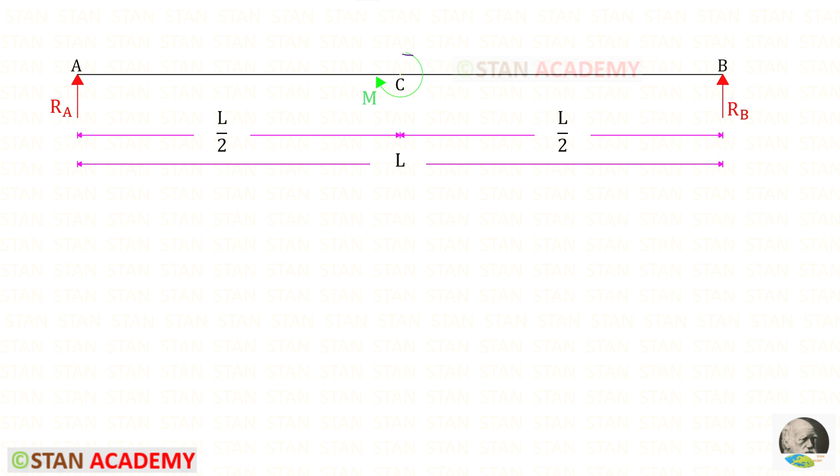Hello everyone, today in this beam we are going to derive the expressions for slope and deflection using the conjugate beam method. This is a simply supported beam subjected to a clockwise concentrated moment M in the center. This beam we have already analyzed for shear force and bending moment. Also we analyzed for slope and deflection using Macaulay's method.

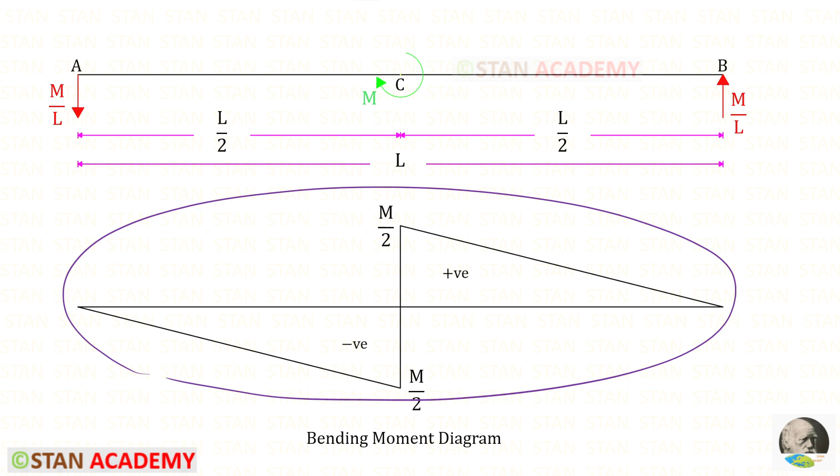Left of the center we have negative and right side of the center we have positive. This is the conjugate beam. I have kept the loading in the negative side downwards and in the positive side upwards. We have to divide the moment by EI.

To find RA dash, let us take a moment about B dash. In this case, we have to follow right hand side rule. RA dash is acting in the clockwise direction, so it will be positive and the distance is L. Let us take the left side UVL. It is acting in the anti-clockwise direction, so it will be negative. We know that for the UVL, we have to multiply the area with the centroid distance.

Let us take this triangle. We know the area formula half into BH. Here the breadth is L upon 2 and the height is M upon 2 EI. So this is the area. The centroid distance about C dash is 1 upon 3 into breadth. Here the breadth is L upon 2. So this is the centroid distance. We are taking moment about B dash. So we have to add the remaining distance which is L upon 2.

Now let us take the right side UVL. It is acting in the clockwise direction, so it will be positive. Now let us take this triangle. This is the area and the centroid distance about B dash is 2 upon 3 into breadth. Here the breadth is L upon 2. So this is the centroid distance.

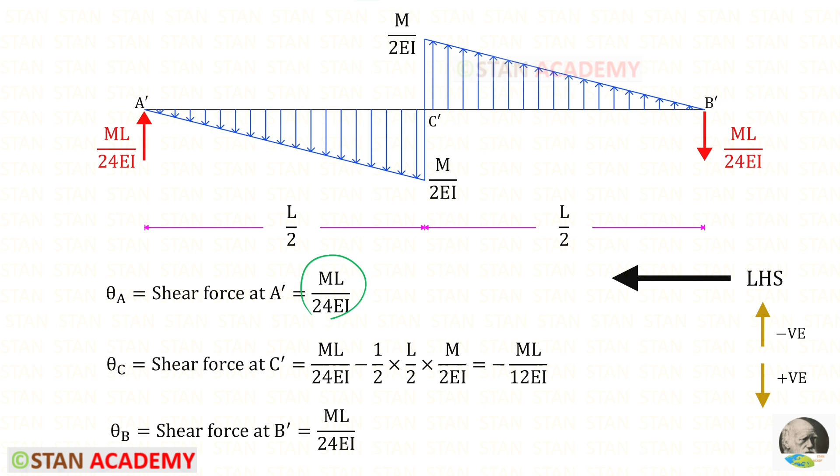Using the left hand side rule, let us find the shear force at B dash. It is acting downwards, so it will be positive. We know that these are the slopes in the real beam in the points A, C and B respectively. Using the right hand side rule, let us find the bending moment in the center, which is at C dash.

This is acting in the clockwise direction, so positive, and the distance is L upon 2. Let us take this UVL. It is acting in the anti-clockwise direction, so it will be negative. This is the area of the triangle and the centroid distance about C dash is 1 upon 3 into breadth, so it is 1 upon 3 into L upon 2. For the bending moment in the center, we will get 0. So in the real beam, the deflection in the center will be 0.

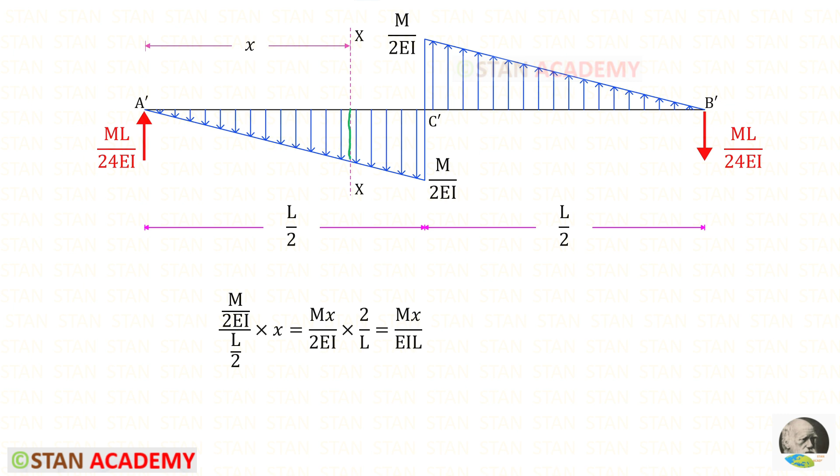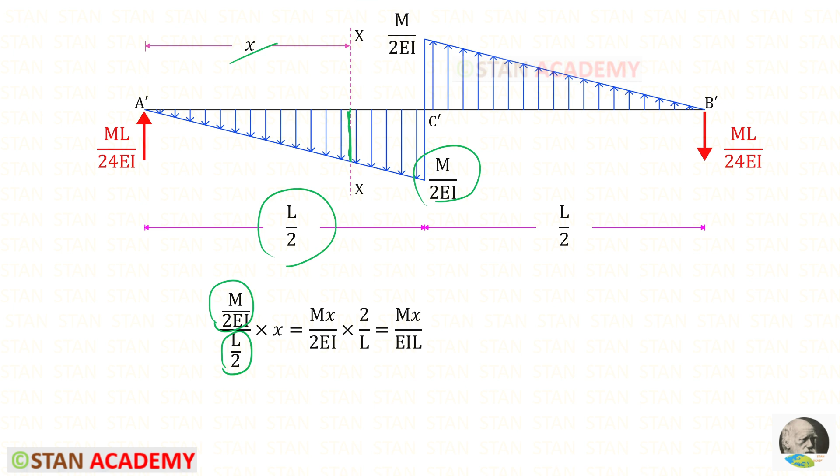Using the right hand side rule, let us find the bending moment on the section. This is acting in the clockwise direction, so positive, and the distance is x. So we will get this. Let us take the UVL. It is acting in the anti-clockwise direction, so it will be negative. We know the area formula half into BH. Here the breadth is x and this is the height. So this is the area.

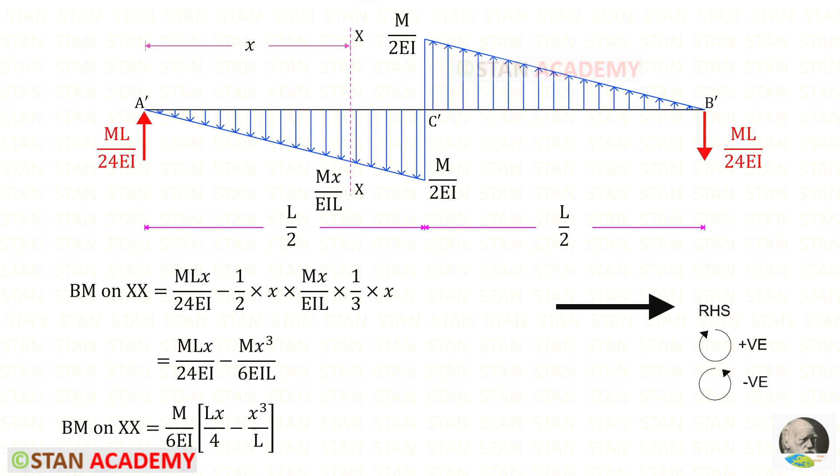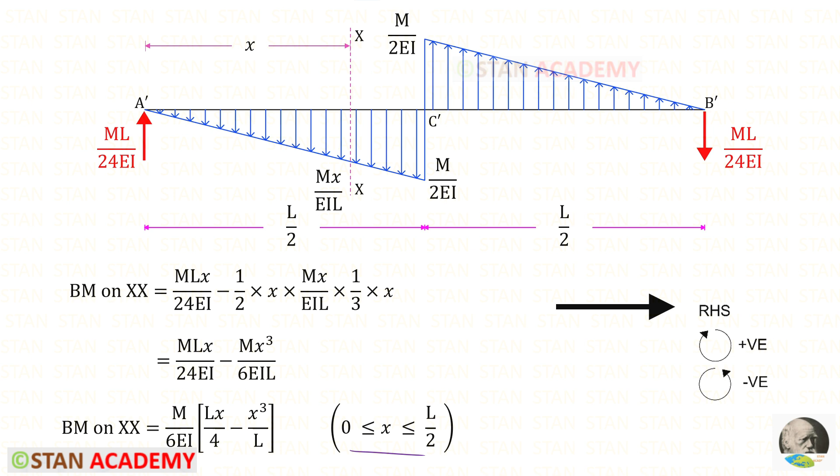The centroid distance about the section is 1 upon 3 into breadth. Here the breadth is x. So this is the centroid distance. After simplifying, we will get this expression. So this is the expression to find the deflection in the real beam at the section. But we have to be very careful. This expression is only applicable from the left end to the center.

Now we are going to find the maximum deflection. We know that slope will be 0 at the point where there is maximum deflection. From this expression we can find slope. We have to differentiate this with respect to x. For x it will be 1. For x cube it will be 3x square. We can take this term on the other side. It will come inversely. When we multiply that with 0, it will become 0. We can take this term on the other side, so it will come as positive. For x, we will get L upon root 12.

To find the maximum deflection, in this one, instead of x, we have to apply L upon root 12. We can write x cube as x square into x. We know that x square is this one and x is this one. We can eliminate this L and this L. From these two terms, we can take L square upon 4 root 12 outside. 1 minus 1 upon 3, it will be 2 upon 3. We can cut 2. Here it will be 12. 12 into 3, it will be 36.

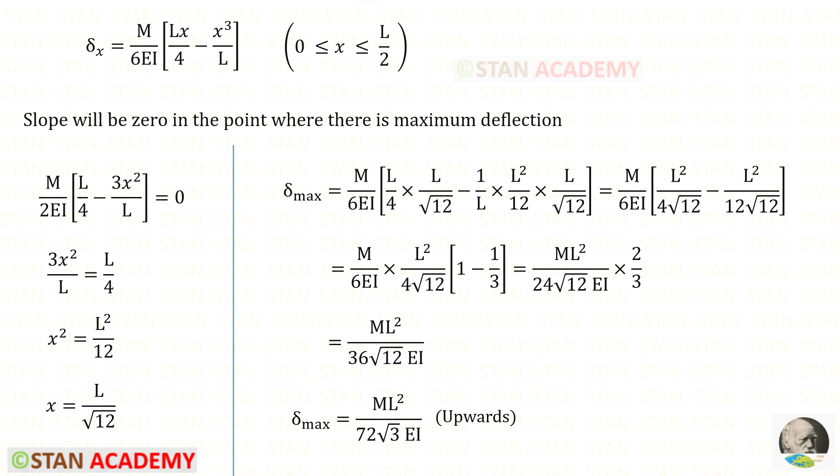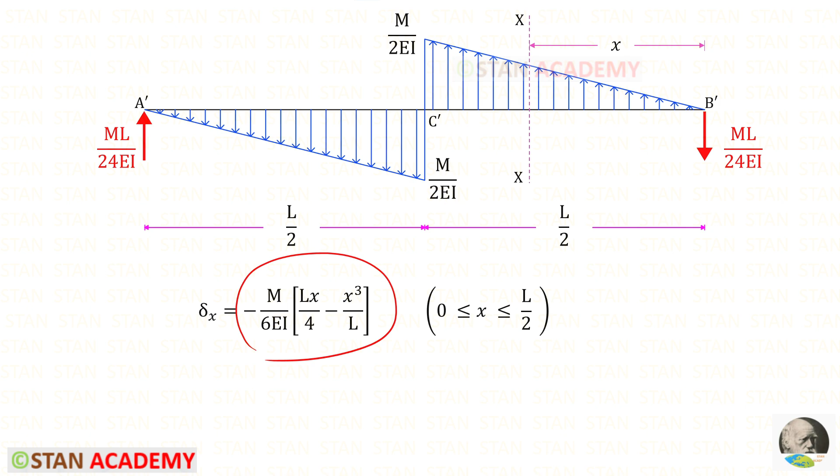We can write root 12 as root of 4 into 3. We can take 4 outside. So it will be 2 root 3. 2 into 36, it will be 72. For the maximum deflection, we have got a positive expression. That means the deflection occurs upwards. If you wanted to find the deflection in the real beam from the point B to the center, this is the expression. We have to just add a negative sign in the previous expression.